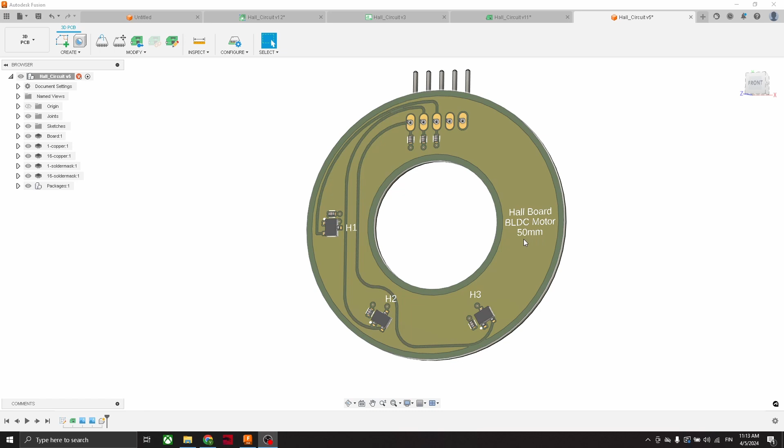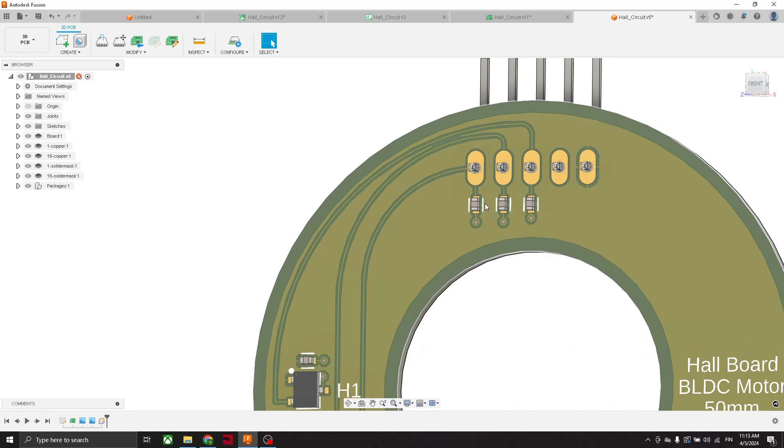In this video we will create this rounded PCB board, which diameter is 50 millimeters. This board is designed for BLDC motors and it has these 3 Hall sensors, distributed 60 degrees from each other. Here I have placed decoupling capacitors for these ICs, and here we have 10 picofarad capacitors for the inputs and outputs. And here we can see the Hall 1, Hall 2 and Hall 3 connector.

First we have to create a new electronic design. And from here we can create a new schematic.

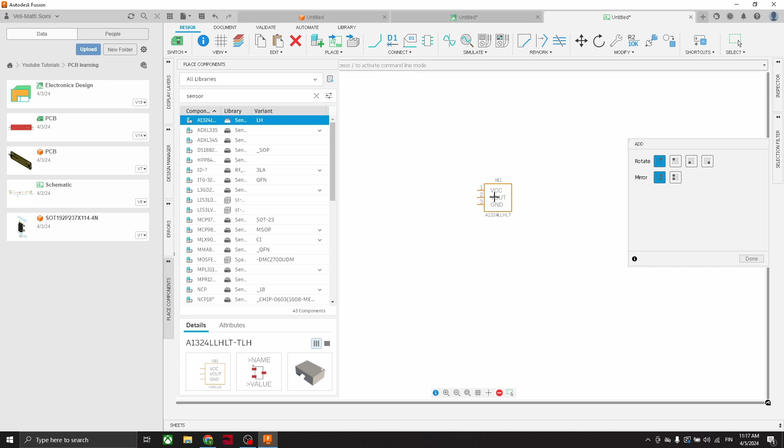Now we can start placing components for this Hall board. So I'm using these Hall sensors. We can place 3 of them. And I will rename this, so this is Hall 1.

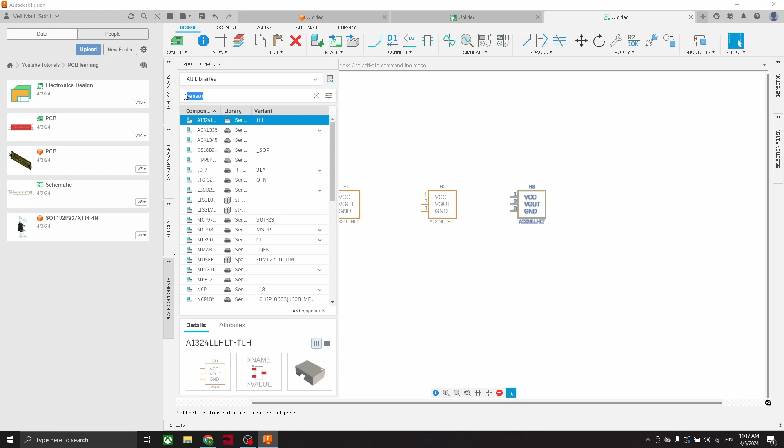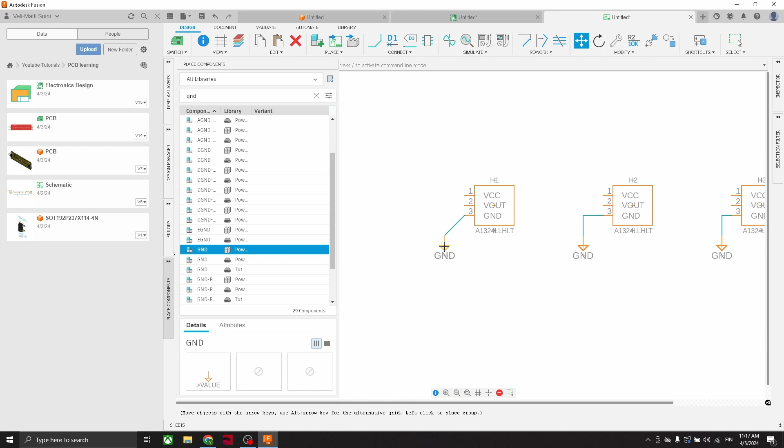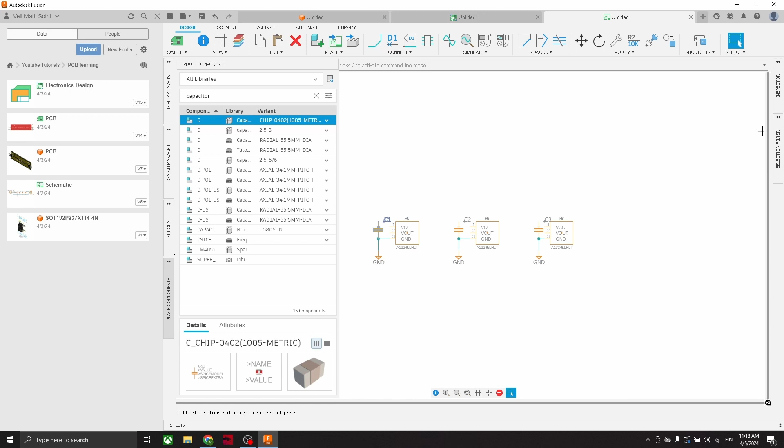Then we can place these ground components. Double click here. Then we can place these decoupling capacitors, and I will set this to 100 nanofarads.

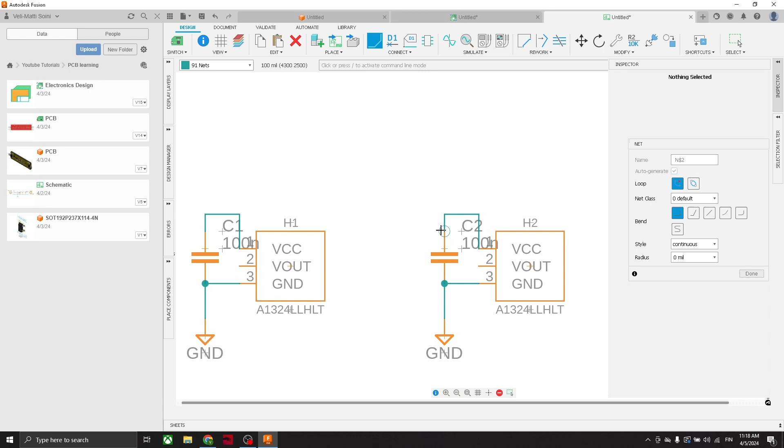Then we can draw this VCC supply voltage from here, and I will move this a little bit more there. Then we can place this supply voltage.

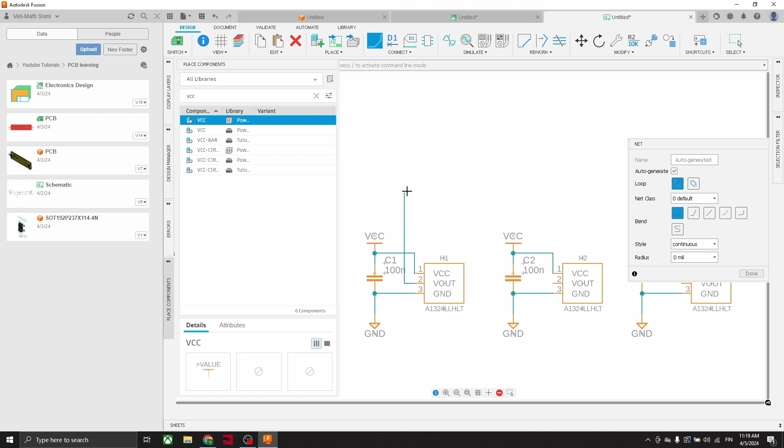And then we can draw from this output, just double click here and create a line like that. And from here we can use this name, and we can name this H1.

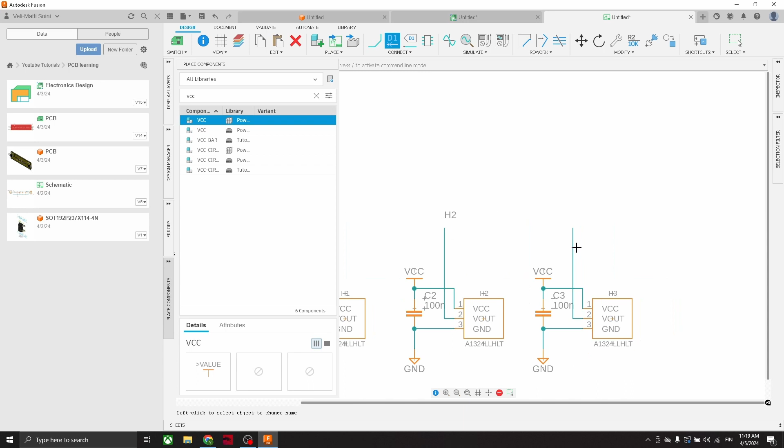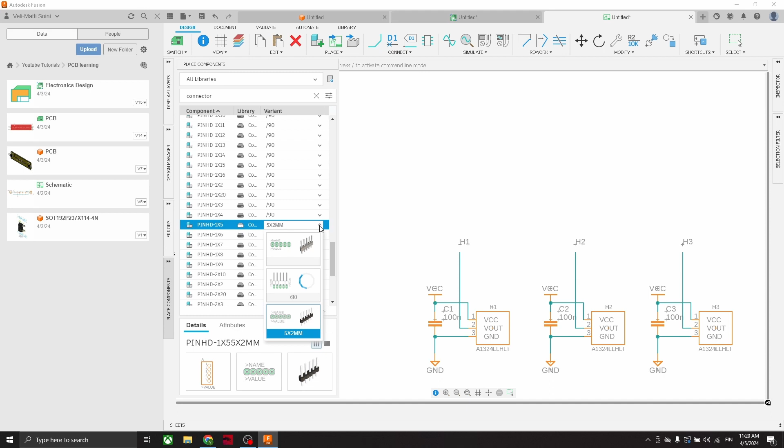Now I search for a connector. It is this one, and from here this 90 degrees. So I will place it using the mirror tool, I will place it here.

And now we have these named wires here, so we can also create here. Just double click and create this.

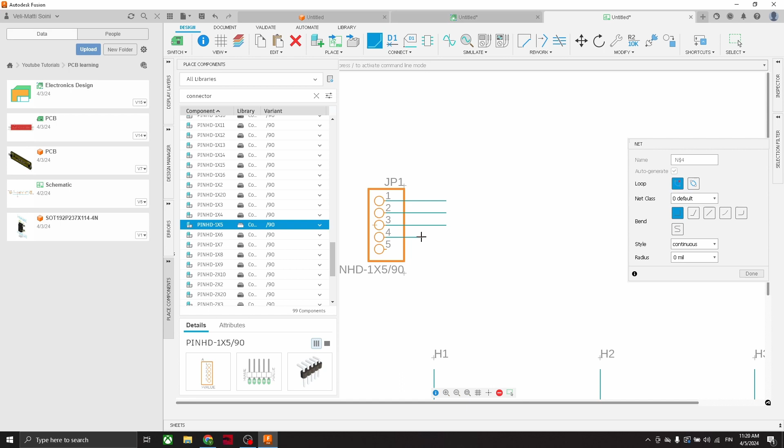And now we can connect this just by using the same names here. So this will be VCC. And now this one and this, they have the same label name, so they are connected. And this will be the GND ground.

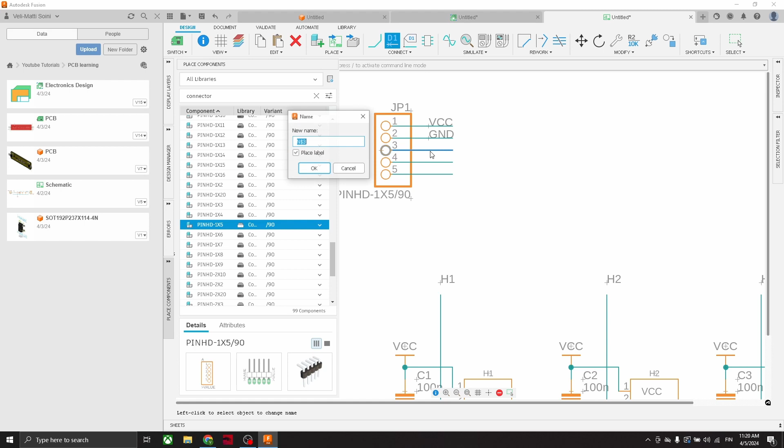And here is all these Halls we have defined here. So this will be H1, and H3. And now I will add some capacitors for this connector.

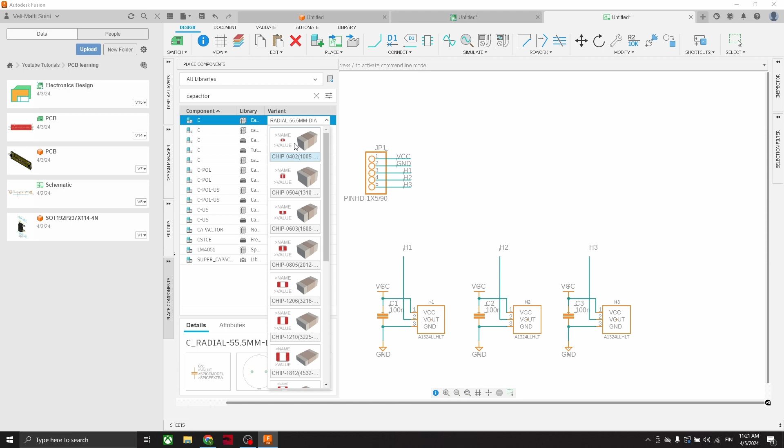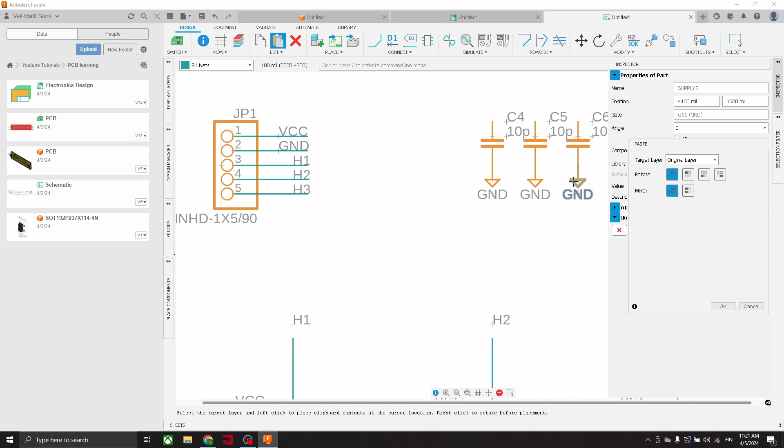Place 3 of them, and this is 10 picofarads. And I will connect grounds here, and we can check that they are connected correctly.

And then I will make lines here, and now we can connect these by using these names.

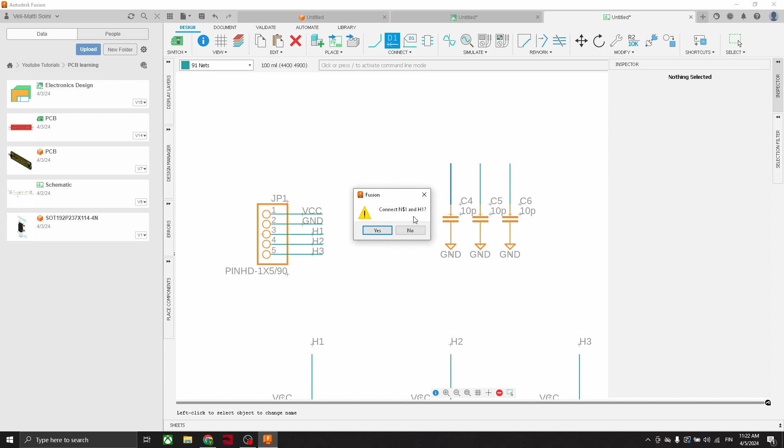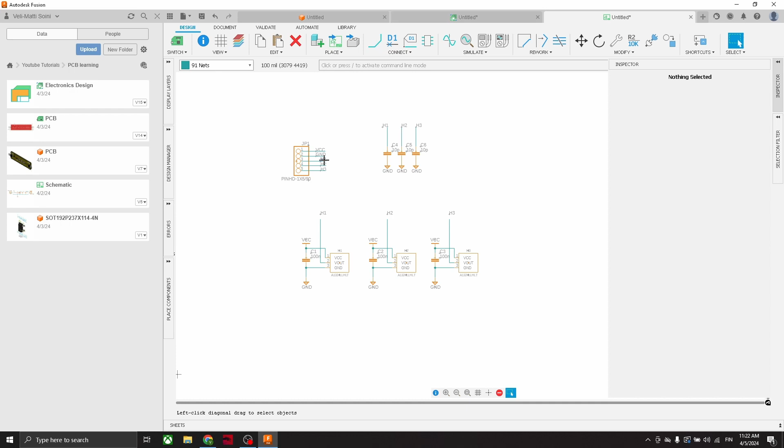So the reason why I'm using these names is because I think it would not be so easy to read this schematic if I had to connect this here and then there, with a lot of things going on, so I think this is more clear to read.

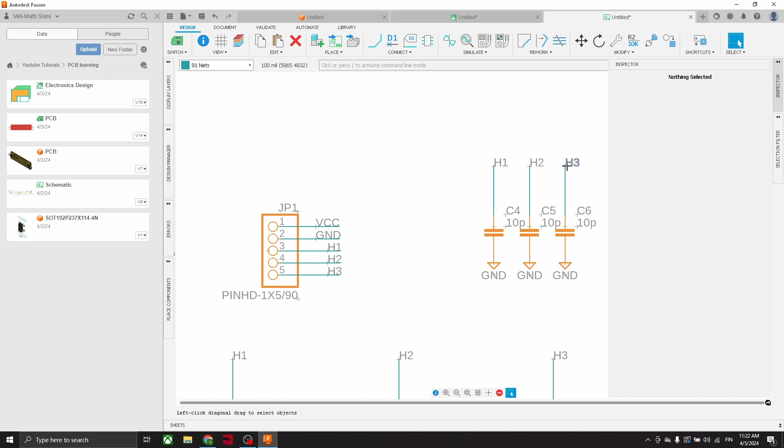So now we have all this schematic here, and actually I will move this a little bit more here. Maybe this here, so now they are symmetric. Now we can save this, Hall sensor.

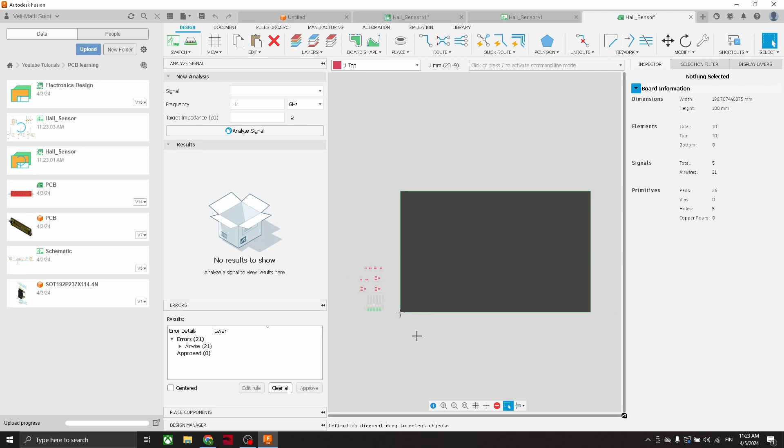And then we can switch to this PCB document. So now we have this PCB document here. I will close that. And here we have this origin point, which is 0.0 millimeters, which was here.

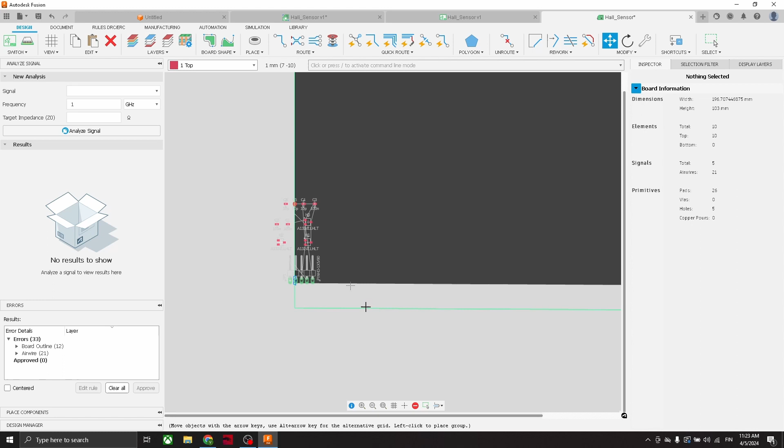So what I do, I will move this to 25 and this minus 25. And then this one 25. Then this one 25. And now I will take all these, they should all be 25.

Now this, there it's correct. Here it is correct. There, okay, so now they are all correct.

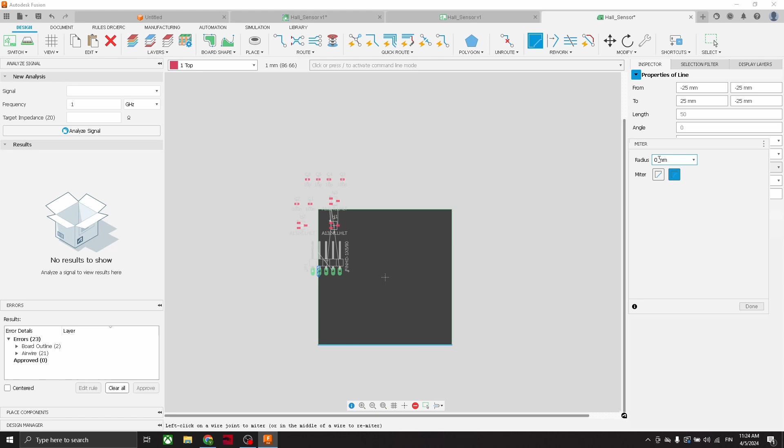And now we can make these rounded corners just from here, using this miter tool. And I will click here, and then this is 25. And now I just click all these corners. And like that, we have now this board.

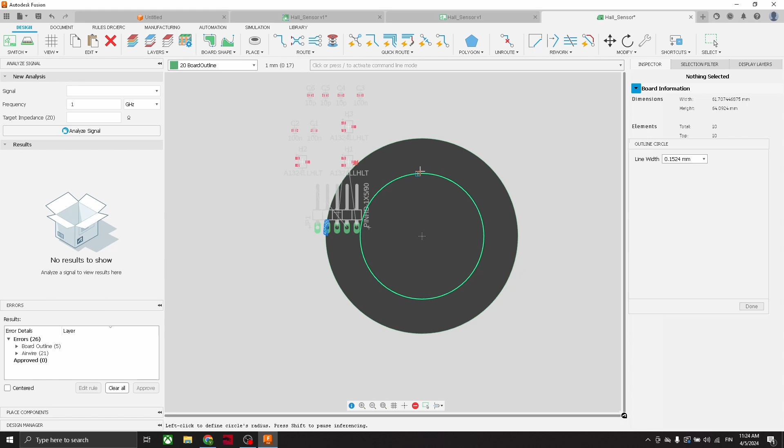And now we have this origin here, so it is a lot easier to make this symmetric because we have it here. So now I can draw this outline circle, and I can start it from 0.0, and I know it will be centered.

Then I can move this somewhere there. I think this was maybe 12.

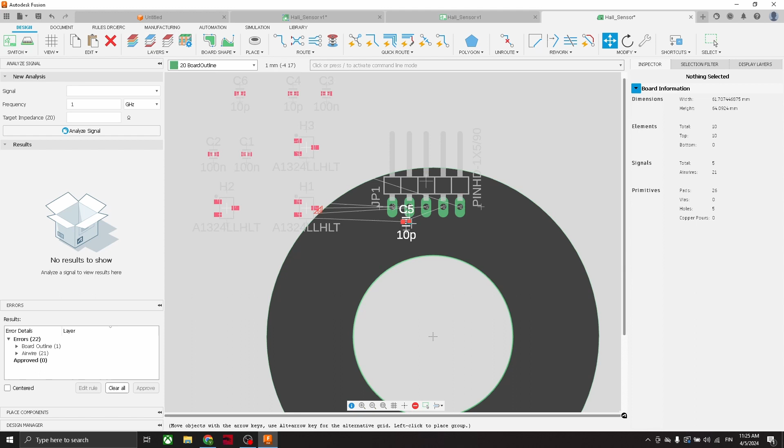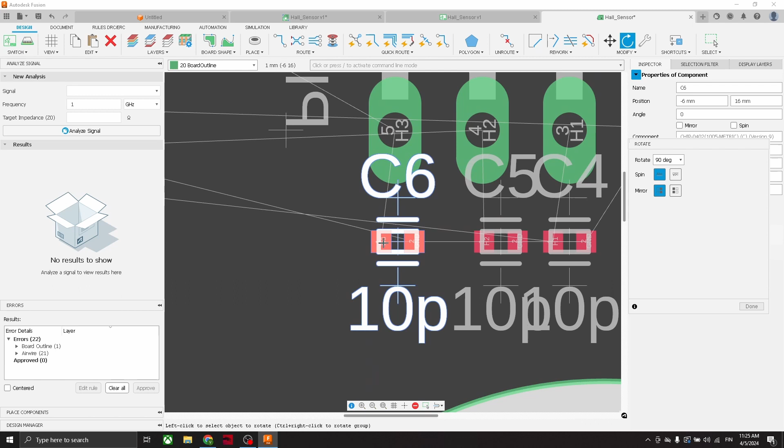Then I can place, I have to use this mirror tool here because this is the bottom side. I will place this somewhere close here. I will rotate this one. So this Hall 3 is upside and this ground is bottom side.

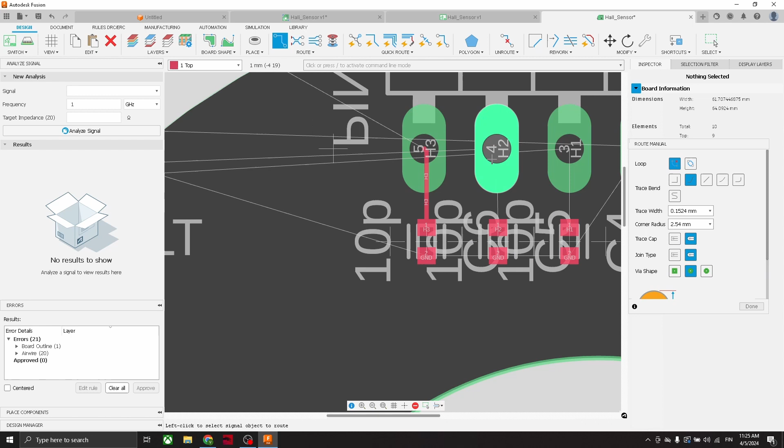And now by pressing Alt, I can use this line movement. So now I can connect this here. Like that.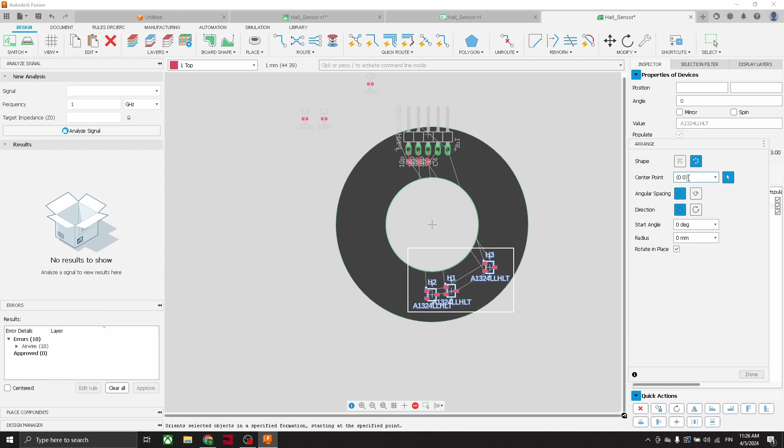And then I will place, I will select these. And then from here we have this arrange, and I will use this. And again, this will be easier because we have 0.0 here, so we use 0.0 here.

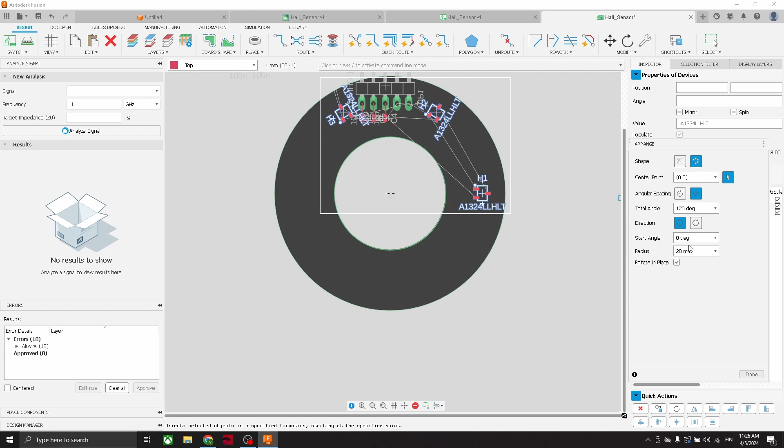And then this angle, and it was 120, and this radius, it was 20 maybe. So now it has already placed them there, and I'm going to move this start angle so it's not on that connector. Maybe 180 was correct. Not this. So here 180.

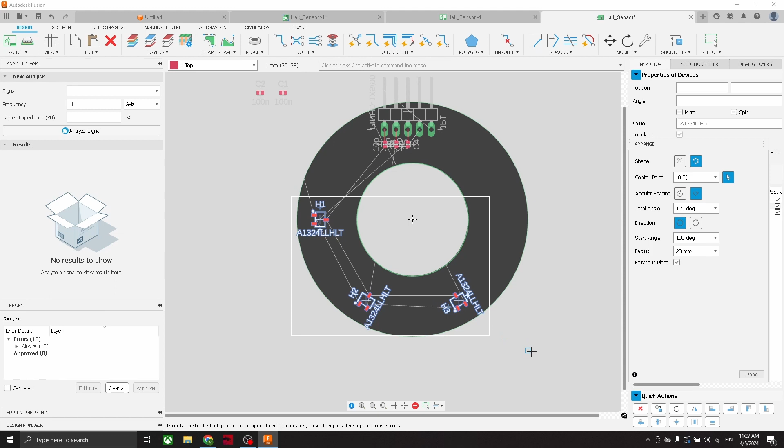Okay, so now it's there, and it even rotates these Hall sensors like that. So now we have them there. We can press done.

Now I will place these decoupling capacitors here close to this VCC and ground pins. This one.

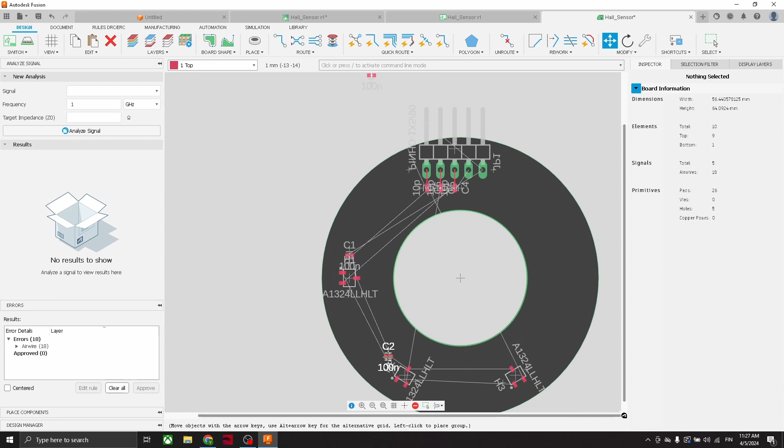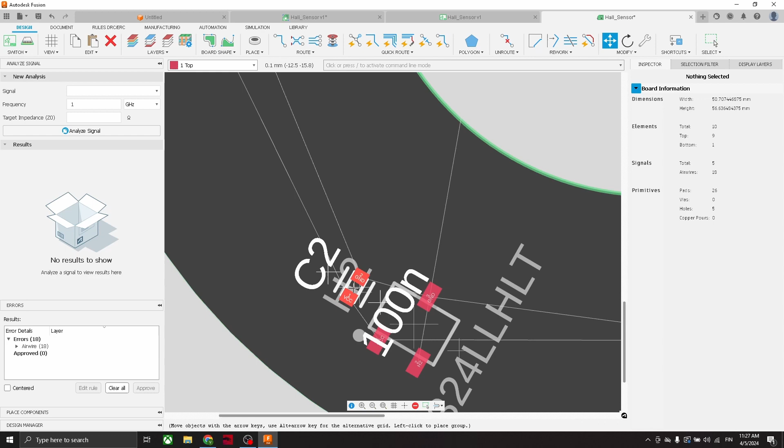And from here we see this is 60 degrees, so we can also rotate this 60 degrees. So then they are aligned like this. And now pressing Alt and move this closer here. So placing these decoupling capacitors, they should be as close to these pins as possible. And then we have this, so there is 120. We can even copy this there. I will move this a little bit here.

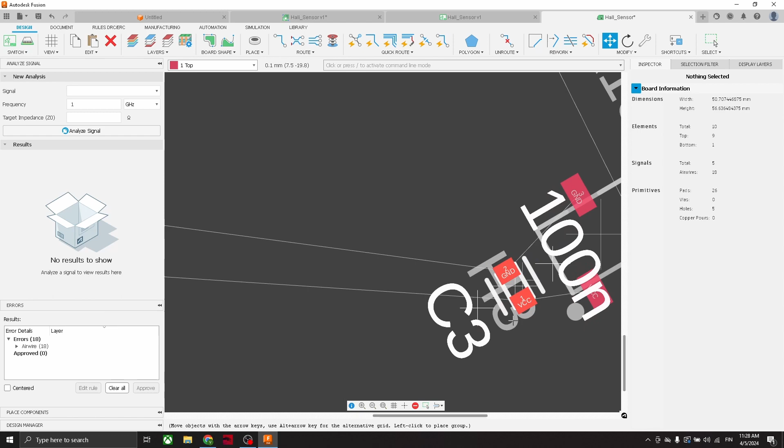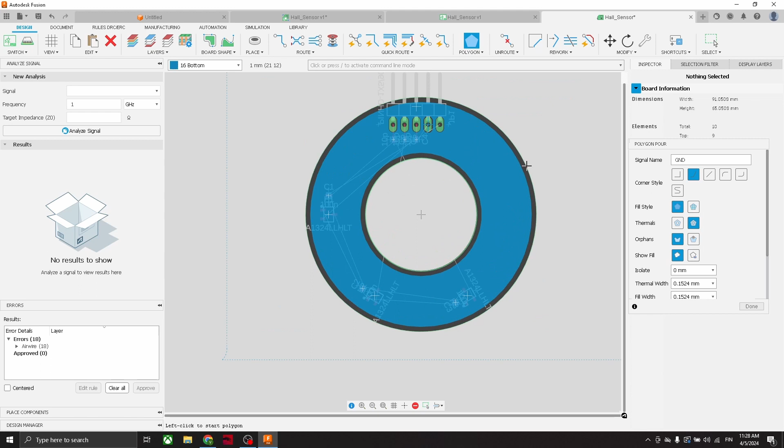And now we could make this polygon pours. So I will use ground for the bottom side. And we can just draw like this. Now we have bottom plane is ground, and then we can create VCC for this top plane.

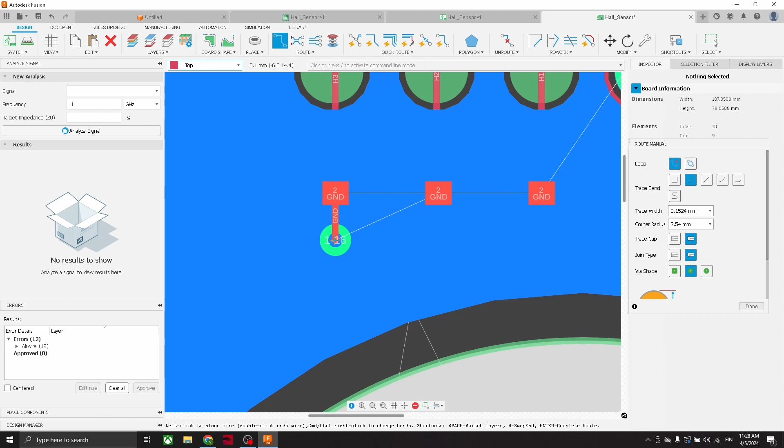And now what we have to do, we can connect these grounds by placing like this, and then click here and press middle mouse click button, and it will create this via. So now it's connecting to the ground plane, which is bottom side. Then we can create the same thing here.

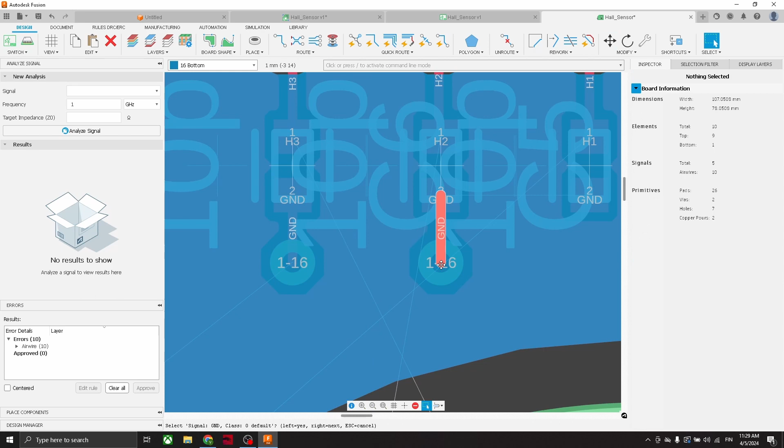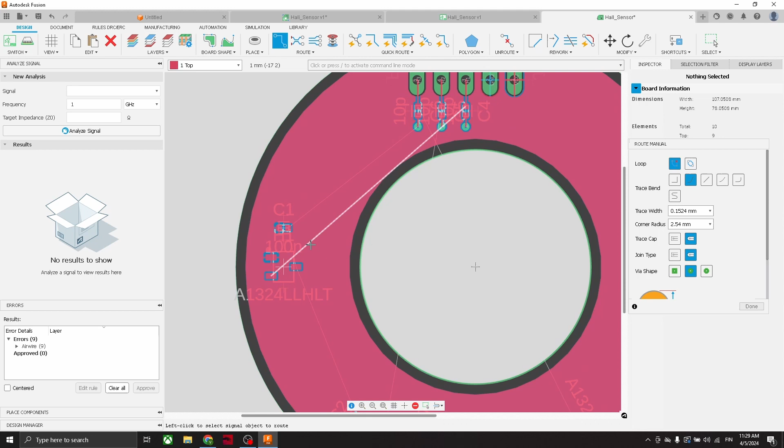I forgot to press this button, so... okay, and then this one. So now they are connected. Then we'll move this closer here. Then we can connect this here. Right, here the same thing, so it's connected ground. All this.

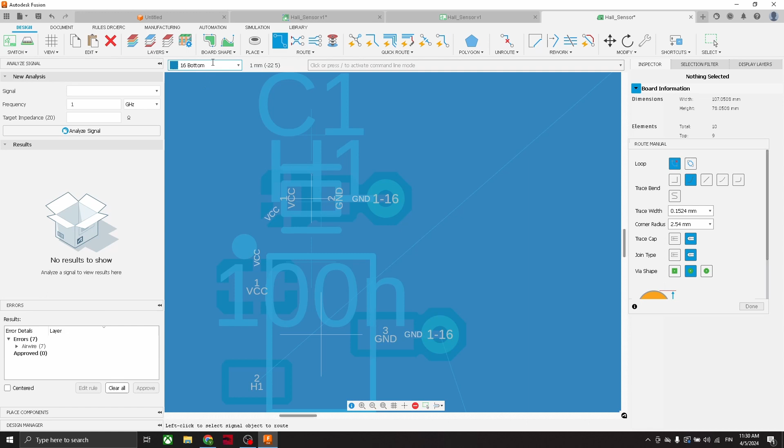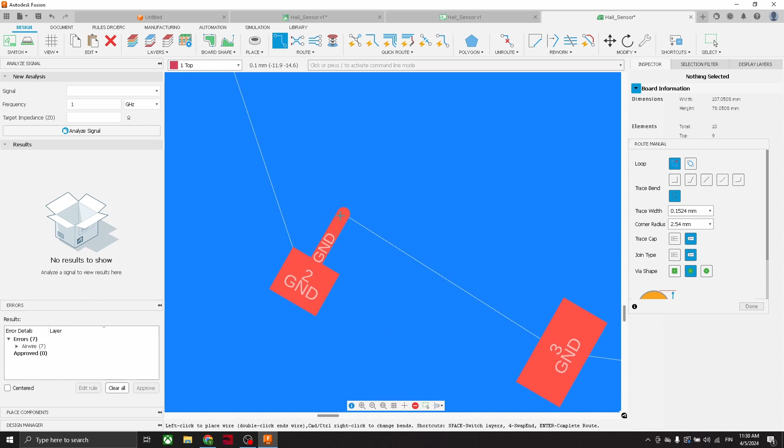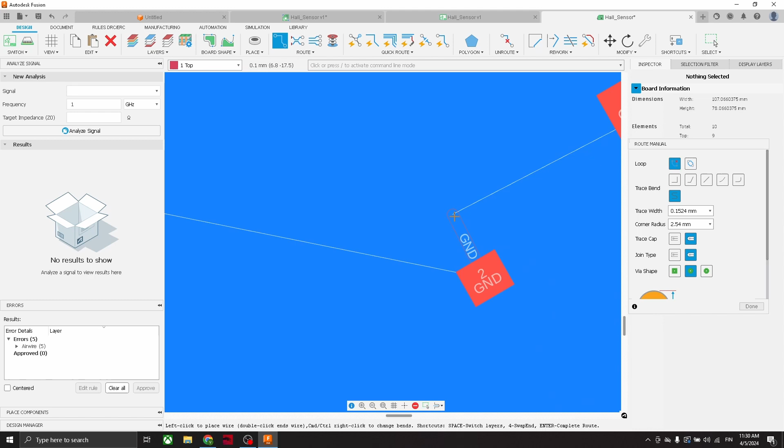And if we will want to move this or there, so we have to use this one. So this is more free movement. Then we can place that. And after placing this, I'm always pressing ESC key, to remove it from this routing. Then same thing here. So now we have all that.

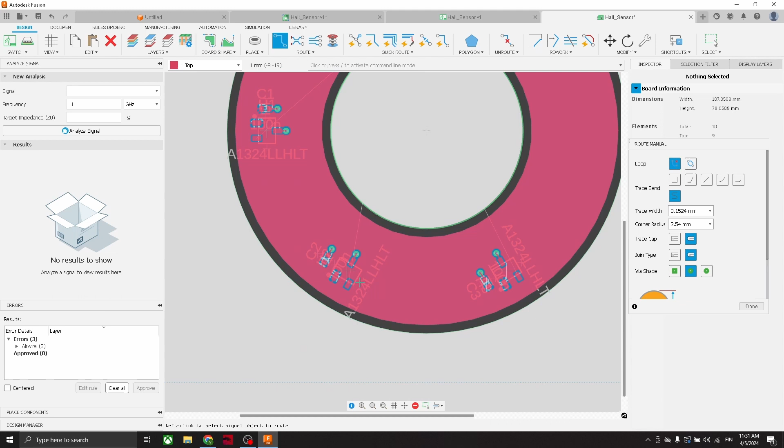And now what we have to do, we have to route this H1, H2, and H3. So it doesn't really matter what bend we use. We can make it with this free tool and just draw some lines.

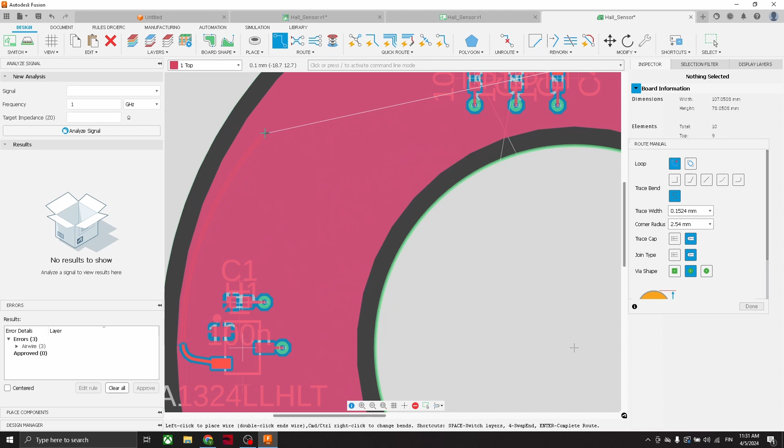Like this. It might be easiest this way because this is a rounded board. Maybe we can use here this. So you can change that as a setting.

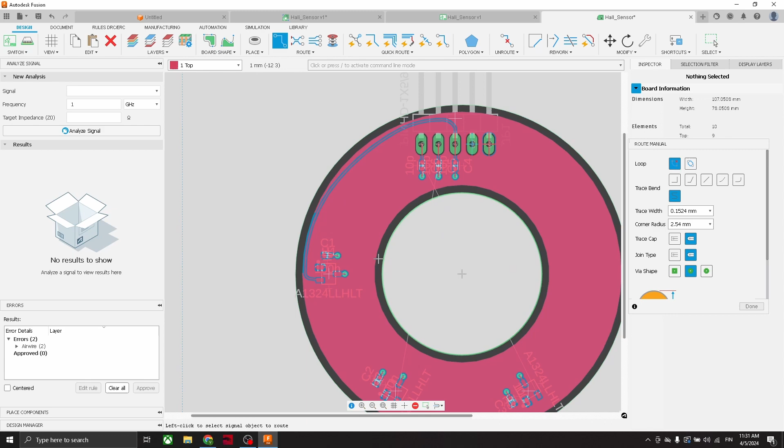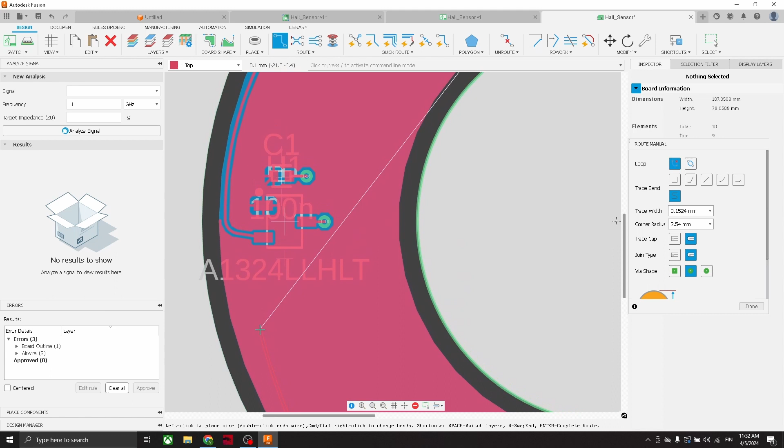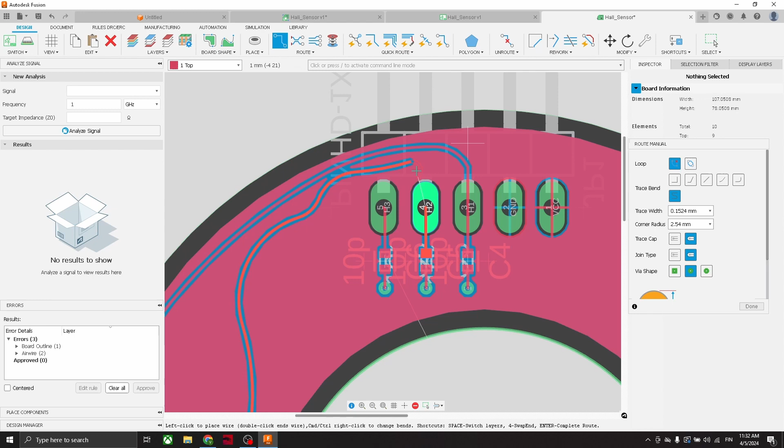And now I try to do the same thing here, starting from there. Go from here. So this is not the prettiest way to do this, but it should be totally okay for both like this.

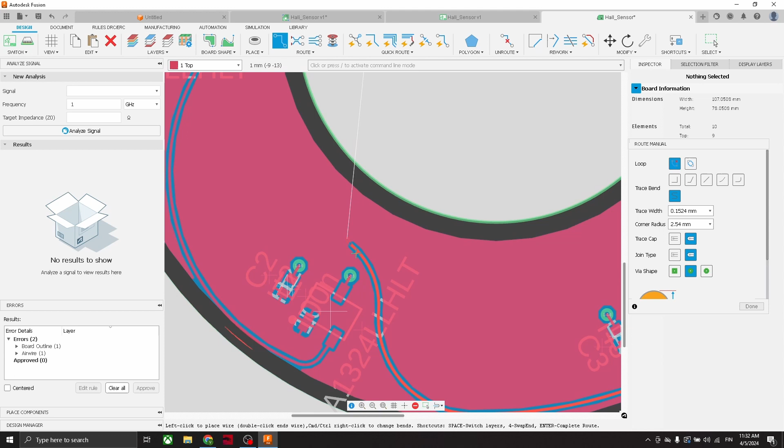Looks like hand drawn, these lines, but okay now. And then the last one, like that. And even though this looks ugly, it will work totally fine.

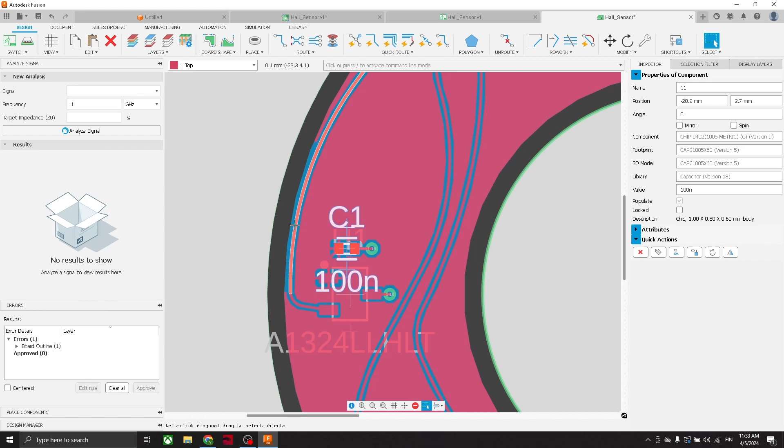We can move this here. I'm pressing the Alt key to move them. And now we basically have this. What we can do here, let's save.

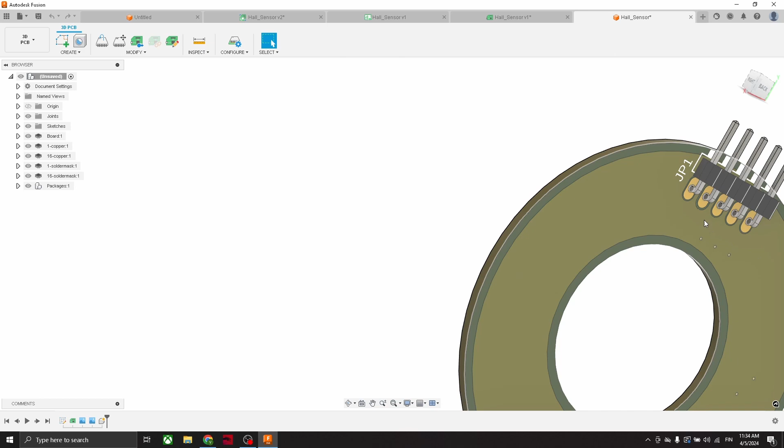So here we have this, and what I do now, I will remove this C1 and this text from here, and we can add text this one. So I will close this now. So let's remove this.

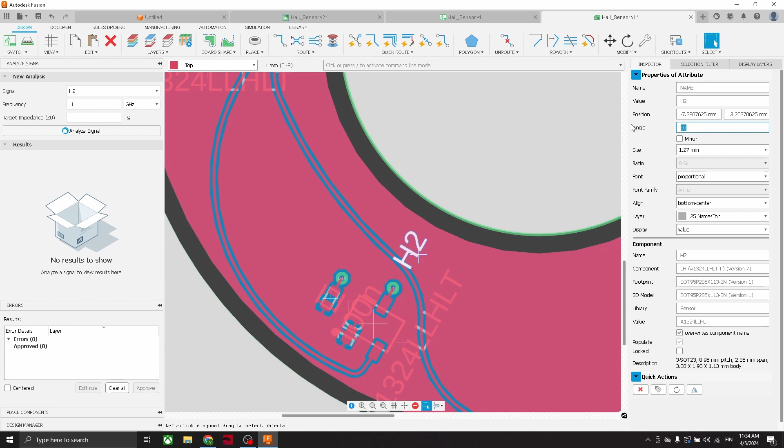And this Hall one can be somewhere there. And how to, we can change this somewhere there. I will change this also to 0 degrees. Is it there?

Now we can add this text on this side. I will remove this.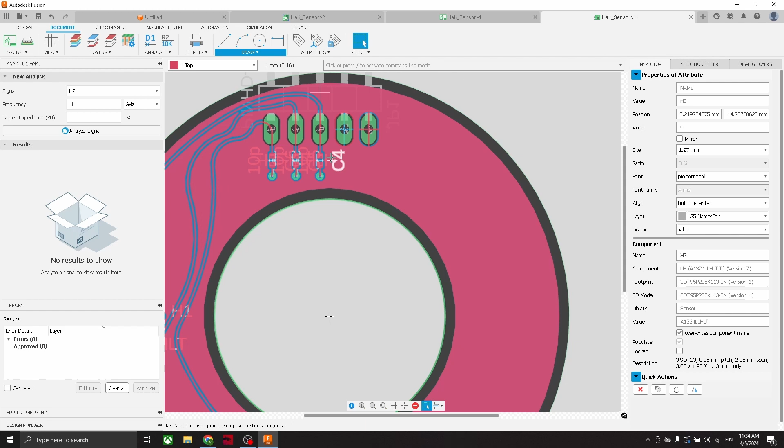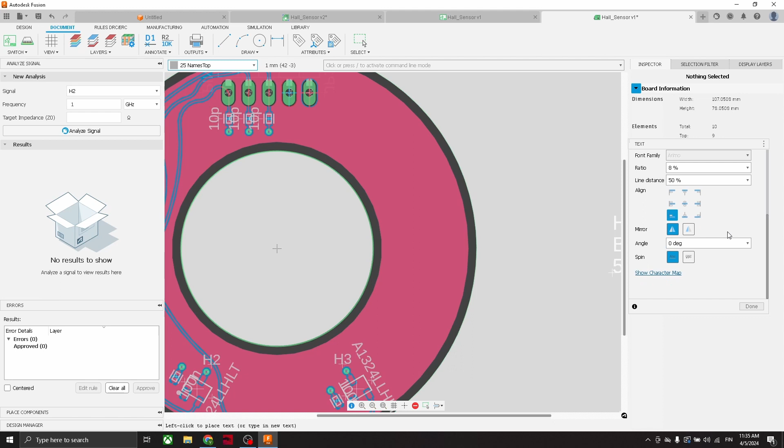And Hall board. And let's use this names top. And then here we can place this first.

Now use this inspector tool. So here we have this align. I will use this center. And as we have this 0 point, we can, now it's aligned with this 0.

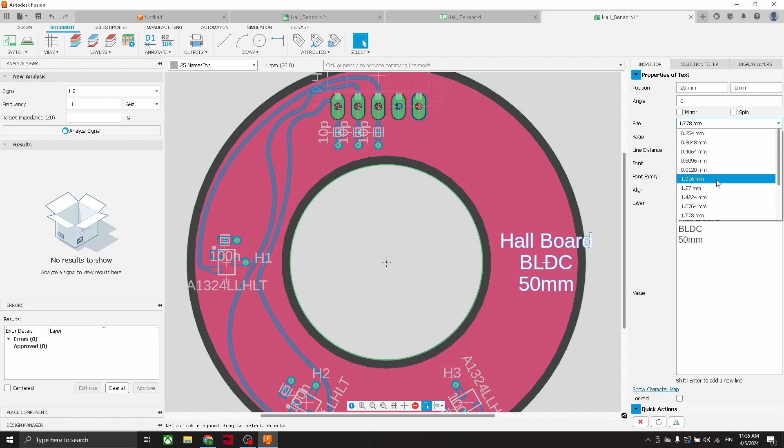And then let's say this is 20. And here I will use this side. Maybe this is, let's say 18.5. So now we have that there.

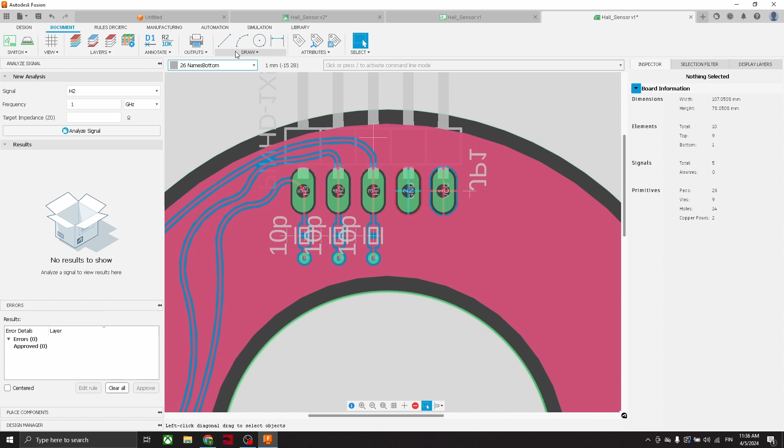And then last we will add this text bottom side. So what we had to do, this is top side, so bottom is names bottom. And now we can write this bottom side, and it will automatically rotate text so it is correct at the bottom plane. So this first is VCC, so we can see this, writing it like that. I will use 8, this 0.8.

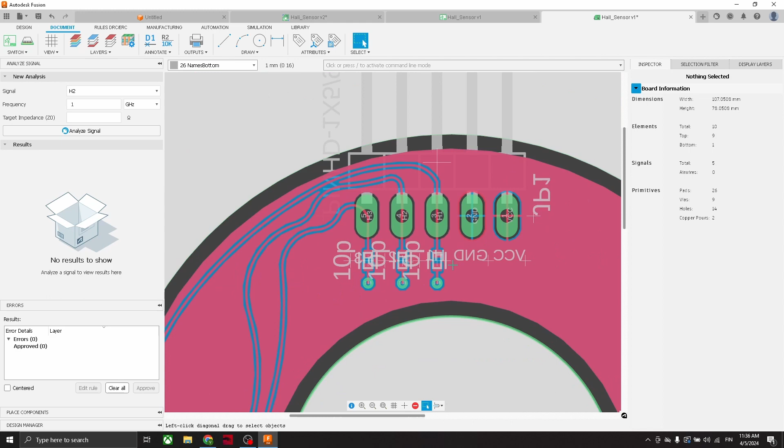Oh, now I think it should be all there. We can remove this text.

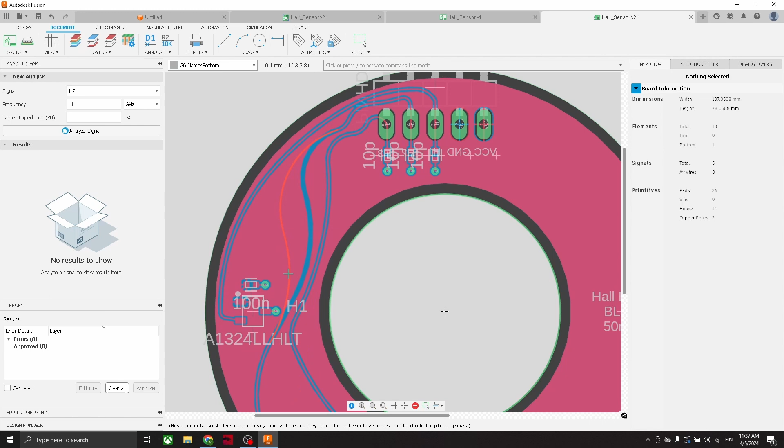And you can modify all these lines how you like. I think it would look best if it's all routed from this outside, with some constant diameter, but for me it's fine like this now.

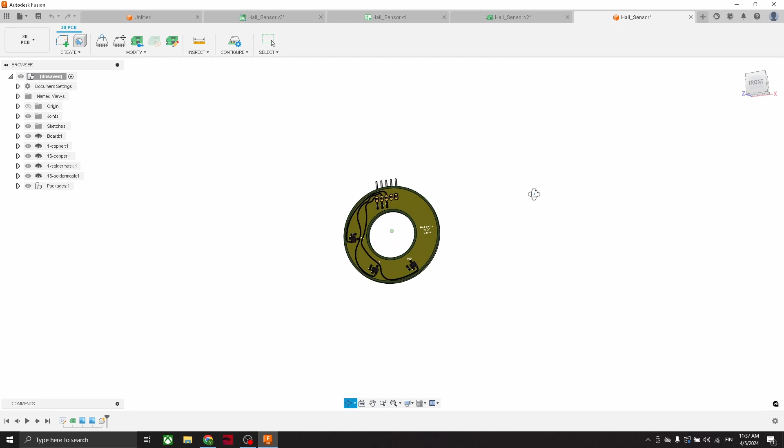Then we can push this 3D model and let's see how it looks. So now we have everything there.

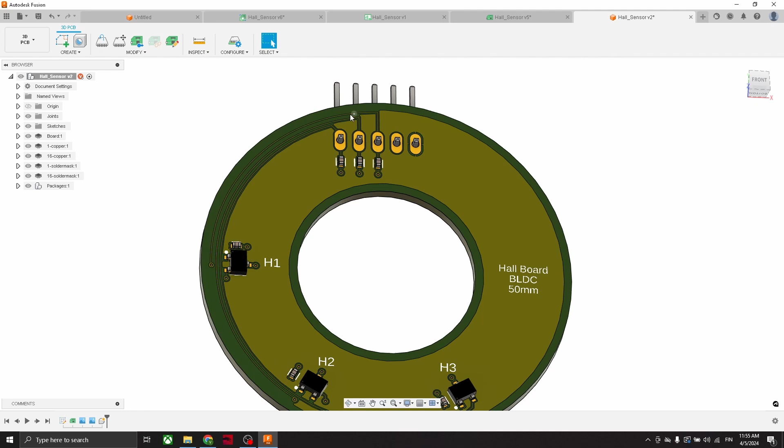So I decided to create again these traces with this constant diameter. It took some time to figure out how to create this, but there it is now, and I think it looks more professional this way. You can try to create this too. Let me know in the comments if you figure out how to do this.